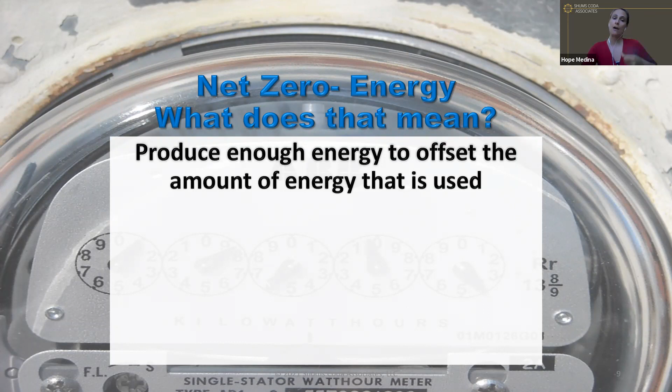So when you start talking about net zero energy, ultimately the basic concept for it is, are you producing enough energy to offset the amount of energy that is being used? So how do you go about being able to produce the energy that you need to offset that energy? Part of it is you have to not so much focus on producing the energy, but you have to really focus on the energy that you're using. How are you using that energy? How are you mitigating that energy use?

So one of the areas you're going to take a look at is your thermal envelope. If you have goals to be net zero energy, you really have to have an efficient, robust building shell. That thermal envelope has to be good. And it's not just the concept of increasing the R value so that you have pink insulation in the wall this thick, right? That's not the concept of a robust building shell. It's an assembly. It's thinking of it as a whole. That means you have a good installation of that insulation.

Is that a grade 1? Is it a grade 2? Obviously we want a grade 1, but you also have to think about your air sealing, right? We don't want air leakage, because when air is able to infiltrate or escape, obviously that means your energy usage is escaping right along with it. So it's an assembly, right? It's your air barriers, it's the air sealing, it's the insulation, so it's an assembly as a whole that's really going to be able to help you when you start talking about the energy that's being used.

And of course, what's the biggest thing that's going to utilize the most energy? That's going to be the equipment that you utilize to condition the building. So that's where things like making sure that you do mechanical load calculations that are required out of the IMC and required out of the IECC come in, so that you can determine that the commercial mechanical equipment being installed has been sized appropriately, that it's not too big or even too small for what the project is requiring. That's also where manual J reviews and manual D's come in. You're taking a look at, on the residential side, is that mechanical equipment sized for what you need? Because you don't want to have something obviously oversized for many reasons. But when you start talking about being a net zero community, oversized equipment really is a detriment in being able to get there.

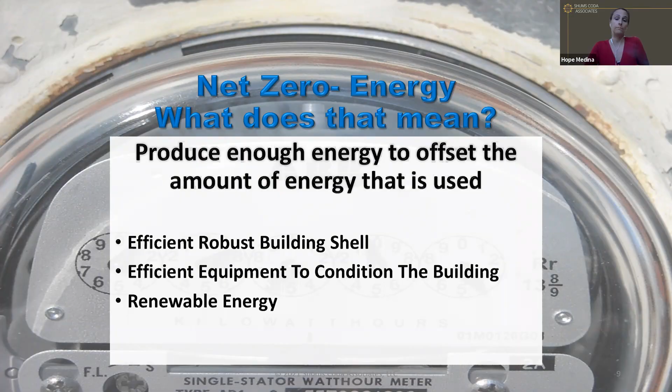So you don't necessarily have to start from scratch when thinking about net zero energy. The IECC in 2021 does have two appendices that came in, one on the residential side and one on the commercial side. On the residential side, it's actually a fairly easy pathway to utilize to get to net zero energy. It's very similar to what another jurisdiction in Colorado has been using for years, when they adopted the 2015 IECC to incorporate into their net zero program. It utilizes the ERI path to get there, which is a useful, enforceable way to really get to net zero energy on the residential side.

Now on the commercial side of this particular appendix, it doesn't necessarily address the energy efficiency components of a commercial project. It basically talks about what you need to do to put on renewable energy to offset that.

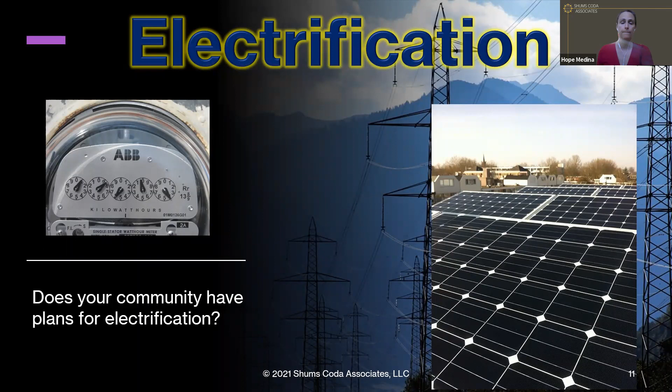So when you start talking about electrification, you can't really state, I want to have electrification right now, tomorrow we are going to be a community that has full electrification. For electrification to really be successful, you need to have an implementation plan. You have to have some sort of plan to get there, with steps to really bring you forward to what your ultimate goal is.

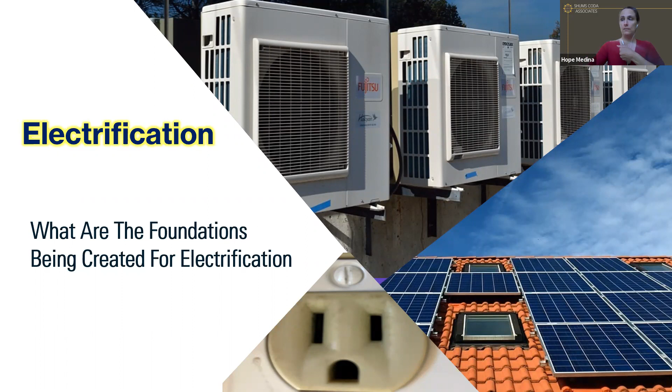And the reason why I say that is because there can be ramifications for electrification. So you want to make sure that your program is successful for what your intention is. And so, again, you really have to think about what that thermal envelope is.

And you also have to think about, when you start talking about electrification, you have to think about your solar provisions. And the reason for that is, if you are truly wanting to go full electrification, you have to have that conversation with your utility company, because are you trying to have full electrification, but you're trying to be self-supporting and self-producing of the electricity that is needed to have the electrification?

Or are you wanting to have electrification without necessarily having the steps and the solar provisions installed, which then would fall on to the utility company to be able to provide the increase in electricity for your particular community. Now, there was a community a few years ago, and I won't say where it was, but I will say it was not within Colorado.

They wanted to do full electrification. And so it came from their council, it came down. And so any new builds had to fully have electrification. And then if you were doing any remodeling, at that point, it kicked in for that. So what happened over the course of a year, they were basically fully electrified as far as their community.

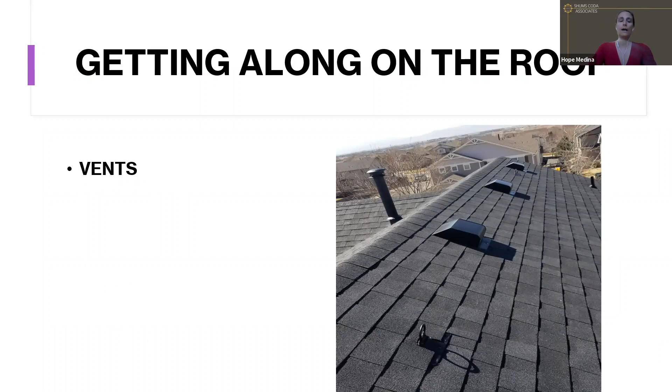And then the architects have to be aware of it so that they can prepare the plans accordingly. And then the contractors know that they have to abide by what's going on. And when I talk about that, it's because there are so many components on a roof already that everybody has to get along, right? You've got vents up on the roof dealing with attic ventilation or B vents. And then you've got piping because you're venting. And then of course you've got skylights, right?

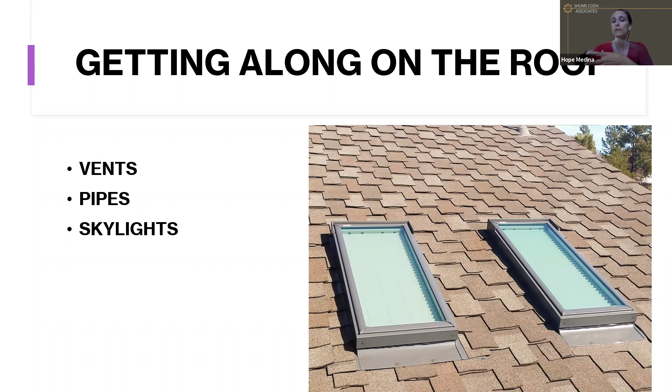Whether you're a commercial project that has potential skylight requirements, or you're a residential that is choosing to have skylights, they are still playing up on the roof. And then you've got solar panels, right? So, oh my, you've got all that going on the roof. And so communities are really making you think about it.

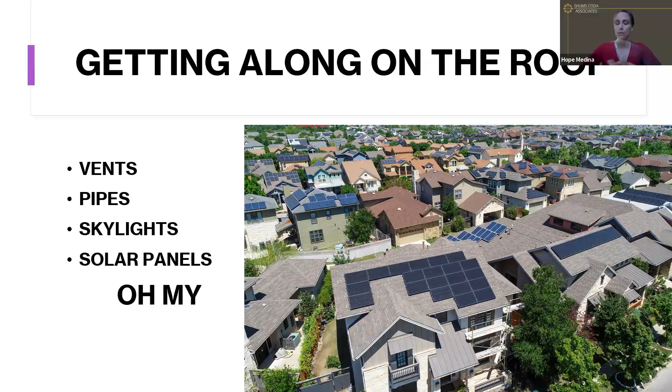And even though the solar ready provisions do state that all these areas where you designate your solar ready zone can't have any venting and pipes and skylights and all that good stuff, they're making it very clear that this can't be there. And they're making sure that their building community knows that, their contractors, the subs, everybody. They try to get the word out for that.

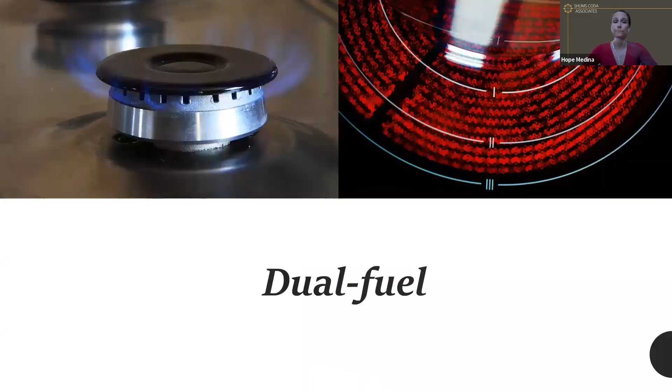And so for electrification, there really isn't an answer that you're going to find within the IECC, right? So you have to start looking outside of the IECC to really determine what you can do to be more efficient with what your goals are. And so this is where that concept of dual fuel really does come into play.

And so I am going to ask if Erica could put up the poll. So my question for you: is your jurisdiction looking at dual fuel requirements? Or are you currently working or have worked in a jurisdiction that does have dual fuel requirements? And just in case you may not know what dual fuel is, basically you're providing an option. If you wouldn't mind leaving it up there for a little bit, Erica, as I explain this.

It's basically, so if you are going to install a gas-fired appliance, say that you're installing a gas stove, then you would run a gas line to the stove. And what dual fuel says is, okay, fine, you're going to run that gas line to the stove, but now you're also going to install that 240 receptacle so that later on down the road, as the gas stove gets replaced, ultimately, hopefully what they're going to do is they're going to install this electric stove in there.

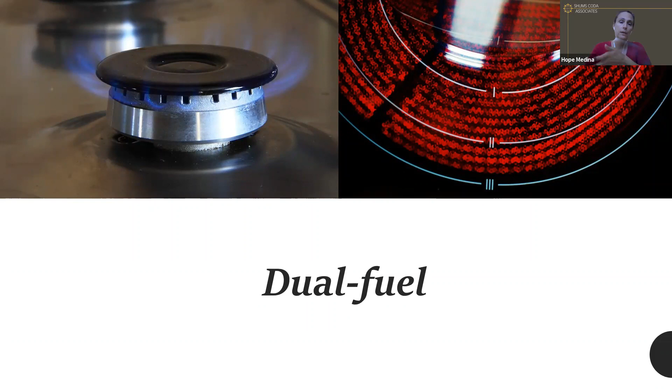Now, I will say, while this wasn't a requirement that's in the 2021 IECC, there was a code proposal that brought in electrification ready, which is basically what I've talked about. You're going to put the gas in, but you're also going to install the electrical counterpart for that so that it's ready when you're building the home for later on, if they go in that direction. And so it was there. It went through a process. It was part of the appeal process to the 2021 and ultimately was not moved forward.

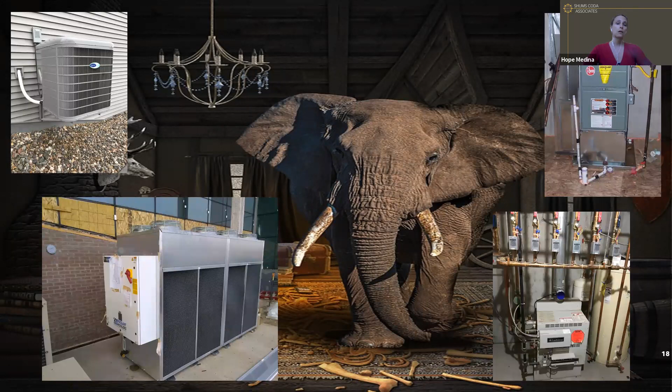So now that we've mentioned a few of these things, I guess we have to really talk about that elephant that is in the room, right? And that's our mechanical equipment. When you start talking about electrification and you want to have full electrification, here in Colorado, we have an awful lot of air conditioners along the Front Range, right? And we also have a lot of gas furnaces, right? Or boilers. And so we now have to think about how we are going to address these types of things. And for those communities that are working on it, there are a few ideas on what you need to do.

Now, the IECC on the residential side and the commercial side has requirements as far as the HVAC equipment, what their efficiency is. Now, on the commercial side, if y'all recall, there's like 16 tables that break out the type of mechanical equipment with what the efficiency is. And then on the residential side, it has to meet the minimum federal efficiency requirements.

What you find in the code book, those numbers are actually the federal minimum efficiency requirements. And every cycle they get updated. They get updated by one particular person who has taken that on, because it doesn't automatically kick in, although now I believe it will automatically kick in. But that's what we have to require. We as jurisdictions have to require what's in there, and we have to require what the minimum is.

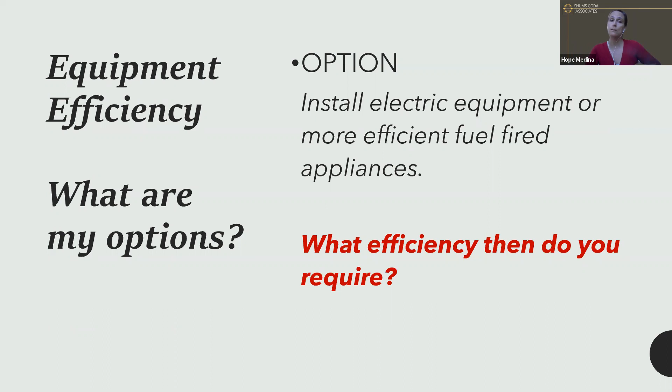So what efficiencies do you start requiring? Do you just pick numbers saying you have to have something more efficient? The minimum is 80, does it have to be 81? So then you start thinking about how you can determine the best opportunity to really get that equipment efficiency, but still stay within the parameters of what's permitted.

And that's where you come back to the IECC, because the IECC does have some options and possibilities for you. We're very familiar on the commercial side with section 406, your additional efficiency packages. It gave you like 6 options. You could do A, B, C, D, E, or F, and you could choose one of those. Well, one of those happened to be more efficient HVAC equipment.

And so here is where you can say, you have to install electric or install more efficient HVAC equipment in accordance with C406.2, which says you either have to do the 5% or the 10%, and you could choose which one makes the most sense, because saying 5% or 10% is much better than trying to recreate 16 tables, right?

So that is a possibility. And the nice thing is now on the residential side, in the 2021, there is the new section R408, the residential counterpart to the commercial additional efficiency package. R408.2.2 has a requirement for more efficient HVAC equipment, and it also provides the information for that. So you have a 95 AFUE natural gas appliance and a 16 SEER air conditioner. So great, it gives you guidance in something that's already been vetted, and you're not just pulling numbers out of the air.

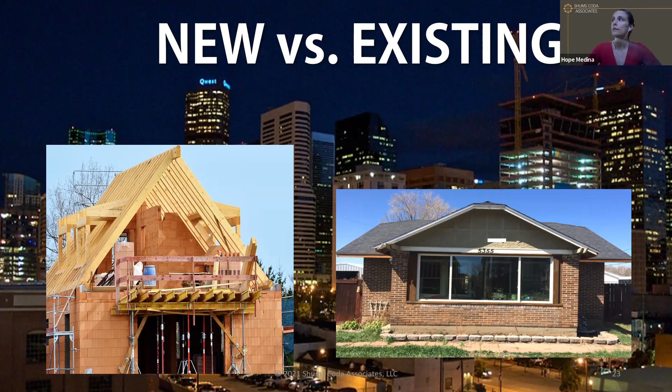And there's nothing wrong with that particular concept, because the idea is you're always trying to make it better than what it was, and not trying to be a detriment. So that's something to really consider and think about. And of course, I think you've probably figured out from the conversation we've had today that everything really truly does begin and end with that thermal envelope. All of your goals really start with that thermal envelope.

And that right there is where you really are going to be able to make an impact on being more efficient. Whether that's how it's installed, making sure all the information is provided on the plan so that it can be installed the way it was designed to be. Everybody understands it's not like you hook up that air conditioner to the insulation to power it, right? That's not where your efficiency comes from. But because you have a good thermal envelope that's been designed and installed properly, you can have smaller equipment, which is where your energy efficiency improvement comes from.

And then of course, size does matter. As we stated, where you're going to be able to help get to your goals is the fact that you aren't having to utilize incredibly large equipment. You can reduce that size down, which will help you get to net zero, or to be fully self-sufficient with electrification.

And then let's talk about what departments are involved, because that really can help you be successful. Maybe more in the past than currently, it was often talked about, we want to do these types of things, but the building department wasn't necessarily included, and then it was dropped in the building department's lap to figure out how to enforce it. And the great thing is, and I'm so happy to say it, that truly isn't necessarily the case now. There's an awful lot of interdepartment communication and working.

And I've been working with a jurisdiction, and the nice thing is, for the code adoption, it wasn't just the building department working on this. They have solar that they're wanting installed. They have electrification requirements. They have higher efficiency mechanical equipment. They have net zero energy. So they're basically trying to do everything that I just covered in this webinar.